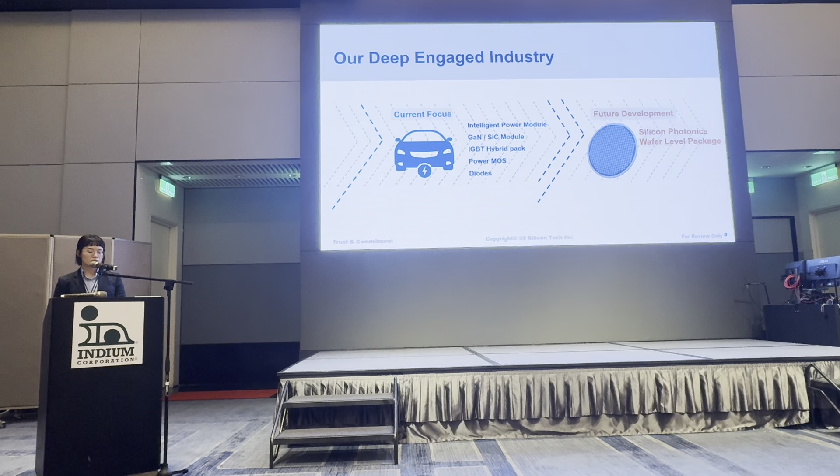We're also excited about expanding into some new territories and seeing great potential in wafer-level packaging and silicon photonics technology. That's where we are heading next. Now you might be wondering what 3S stands for. Well, each S represents a key part of who we are: system, solution, and service. Actually, these 3 elements really capture our commitment to power device assembly.

When we talk about system, we are focused on providing reliable equipment that really works for our customers' needs. For solution, we don't just sell equipment. We work closely with our customers to solve their specific challenges. And service, that's about being there for our customers, not just during installation, but whenever they need our support, including maintenance and technical assistance to ensure equipment quality. This is how we approach power device assembly, bringing these 3 elements together to create real value for our customers.

What sets 3S apart is our ability to integrate process, equipment, and materials into one complete solution. We don't just sell equipment, we provide comprehensive solutions that bring all these critical elements together to solve your semiconductor packaging challenges.

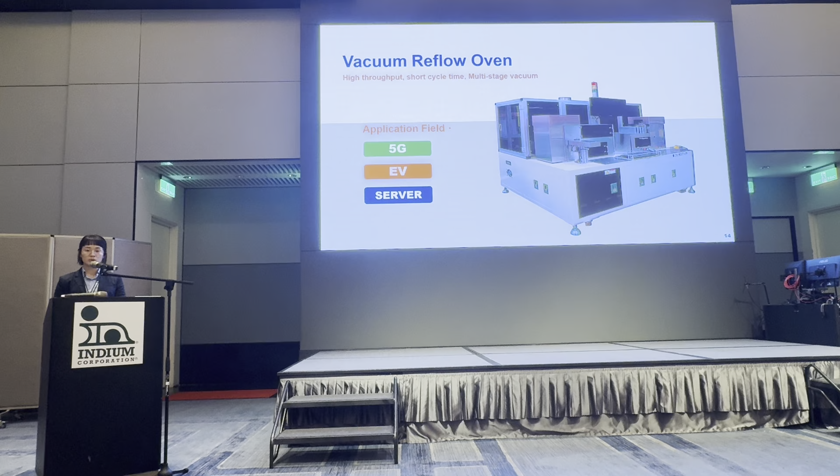Now, what makes our vacuum reflow oven special? It has two key parts: the multi-stage vacuum design and flexible temperature profile. We put separate vacuum chambers in key heating areas, so we can quickly create vacuum. This helps make the process better and greatly reduce void rate. Our multi-stage vacuum design also helps control how fast the flux turns into gas. This fixes common problems like solder splashing and chip flipping. Also, it can set different temperatures in different zones, making it easy to work with many types of solder paste.

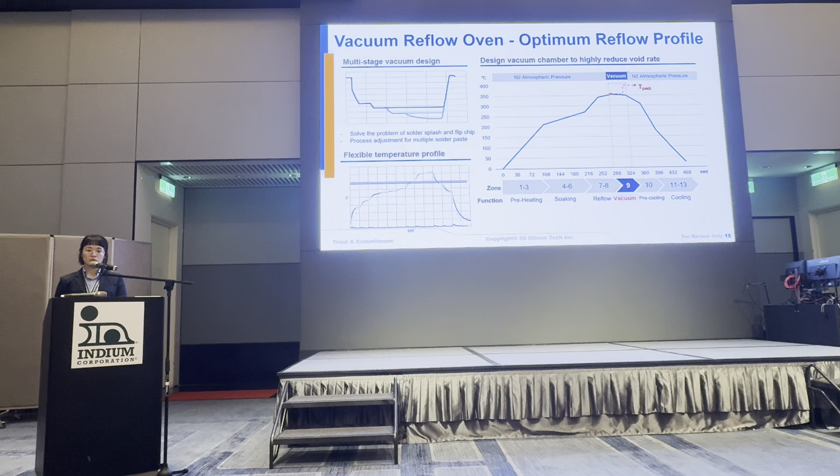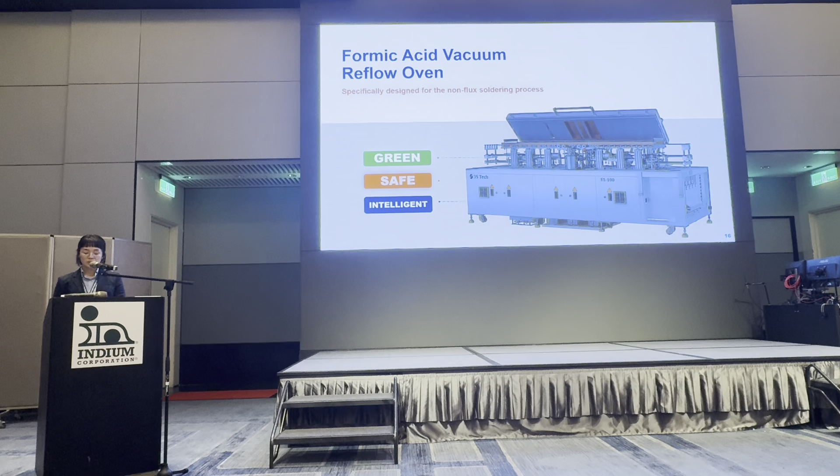Next, this is our formic acid vacuum reflow oven, which we developed in 2020 to help customers who need a non-flux soldering process. Our formic acid vacuum reflow oven comes with several smart features. It includes intelligent automation with real-time monitoring, from formic acid management to oxygen and toxic gas detection. And as I mentioned before, it's fully SECS/GEM compliant and ensures process quality through continuous formic acid purity monitoring. The system also offers comprehensive parameter control and production tracking, making it ideal for high-quality manufacturing.

And about the key safety features of our formic acid vacuum reflow oven: our closed negative pressure system prevents any formic acid or carbon monoxide leakage during operation. We've also built in continuous monitoring of these potentially harmful gases.

For environmental protection, our exhaust treatment system uses catalysts to break down formic acid and carbon monoxide into harmless carbon dioxide and water before releasing to the factory exhaust. So what makes the formic acid process so special?

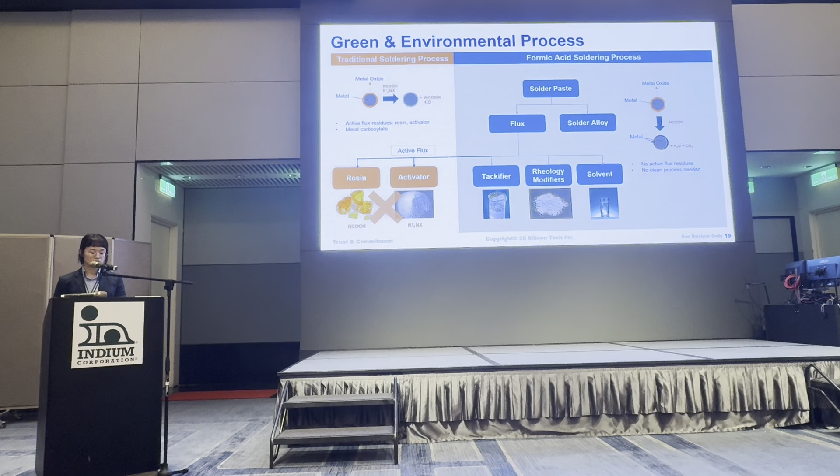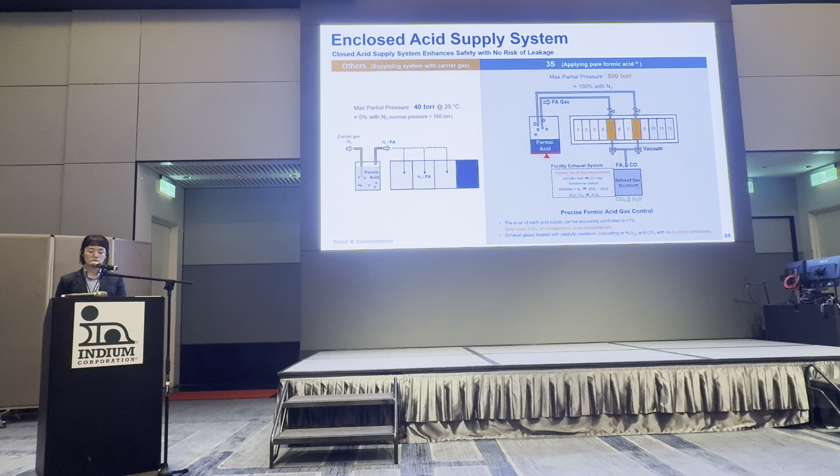Look at this comparison. The conventional way uses a mix of formic acid and nitrogen gases, which only allows for slow passive diffusion under normal pressure. In contrast, our pure formic acid system works under vacuum, creating much deeper and faster penetration.

The test results speak for themselves. Our pure formic acid gas penetrates 5 times deeper into solder powder than the mixed gas used by others. When testing with preforms, competitors' mixed gas often can't fully reduce the oxides inside, leading to poor solder melting. Our system doesn't have this problem.

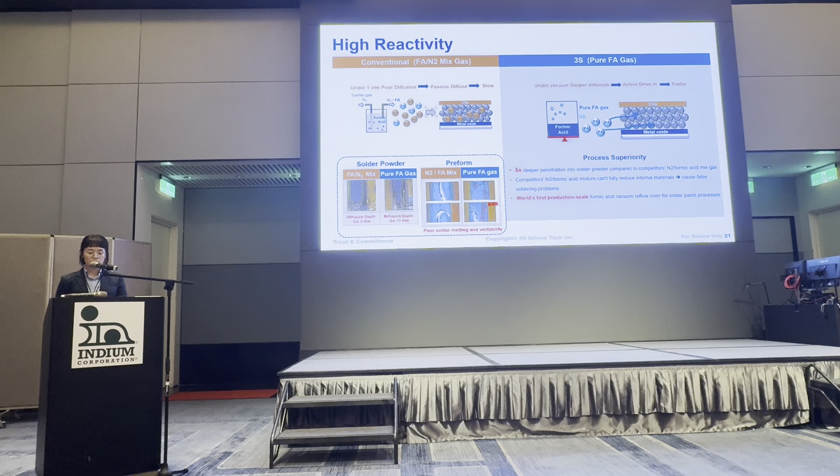And how we made formic acid work faster and better. Traditional systems mix formic acid with nitrogen gas, but this actually slows things down. Think of it this way: nitrogen gas is in the way, making it harder for formic acid to reach and react with the metal surface. Our pure formic acid system solved this problem.

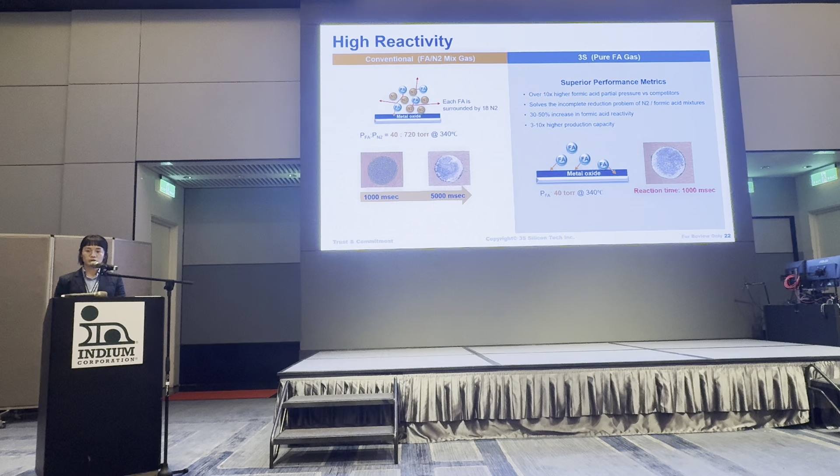With the same amount of formic acid at 40 torr, our pure system completes the reaction in just 1,000 milliseconds. How about the conventional? It takes 5,000 milliseconds, that's 5 times slower. This faster reaction isn't just about speed. It means better production efficiency and shorter cycle time for our customers.

To show our technology leadership, we've secured patents worldwide across key markets including the United States, Europe, China, Japan, Taiwan, and Malaysia. These patents cover 3 main areas: our unique materials and application method, our advanced acid supply system, and our exhaust gas treatment technology. It shows our commitment to protecting our innovation in formic acid vacuum reflow technology.

To wrap up our introduction of the formic acid vacuum reflow oven, here are some highlights of its key strengths. This system completely replaces traditional flux while using very little formic acid. With our secure closed acid supply system, we can deliver precise amounts of acid exactly where it's needed.

The high reactivity and fast penetration speed lead to excellent results. We can achieve void rates as low as 2% and process each strip in just 45 to 180 seconds. For those interested in the technical details, the system includes conductive heating, handles products up to 300 × 400 millimeters, and comes with comprehensive safety features. We also offer optional additions like profilers and oxygen meters to meet your specific needs.

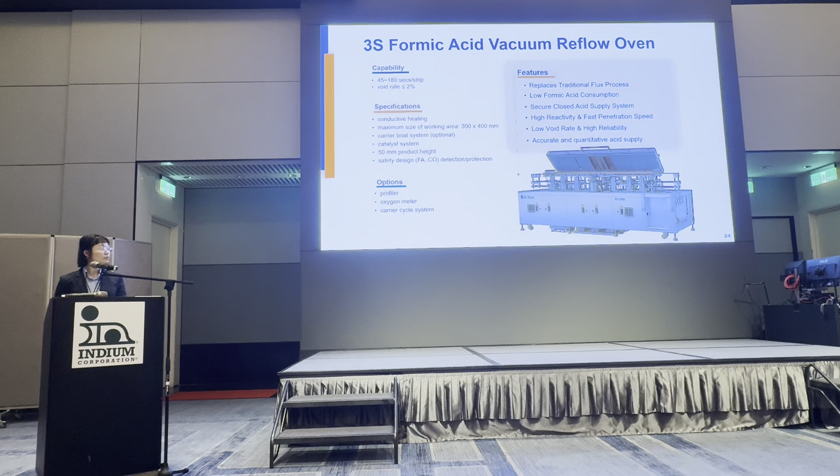Our service at 3S covers 4 main areas: our open lab for testing and prototypes, process development support, 24/7 technical support worldwide, and comprehensive maintenance service. Let me move on to tell you more about our open lab platform, which is one of our most valuable services for customers.

Our open lab is where innovation happens. 3S R&D team designs custom experiments based on your specific needs, whether it's for new products or process improvement. We help plan the right test, create prototypes, and work together to find the best solution for your product. What makes this really valuable is how it speeds up development time. You can quickly test and verify your ideas, helping you get to market faster without major upfront investment.

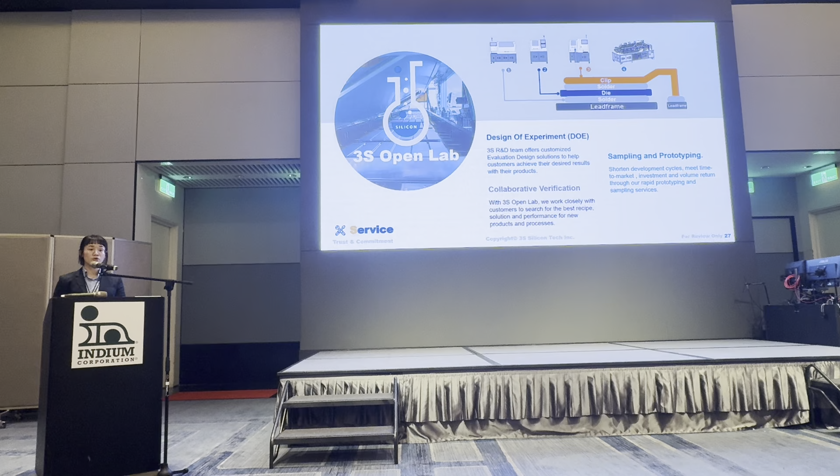In our Open Lab, we offer complete package testing capabilities from start to finish. This includes everything from solder paste deposition, both dispensing and stencil printing, to die and clip bonding. We also handle reflow soldering and finish with thorough quality inspection and analysis. Looking at the process flow you see here, each step is carefully controlled to ensure the best results for your product development.

And this is SAT. It's a specialized piece of equipment which uses ultrasonic technology to detect product defects. Not many companies have one, and we are happy to offer testing service if you need this capability.

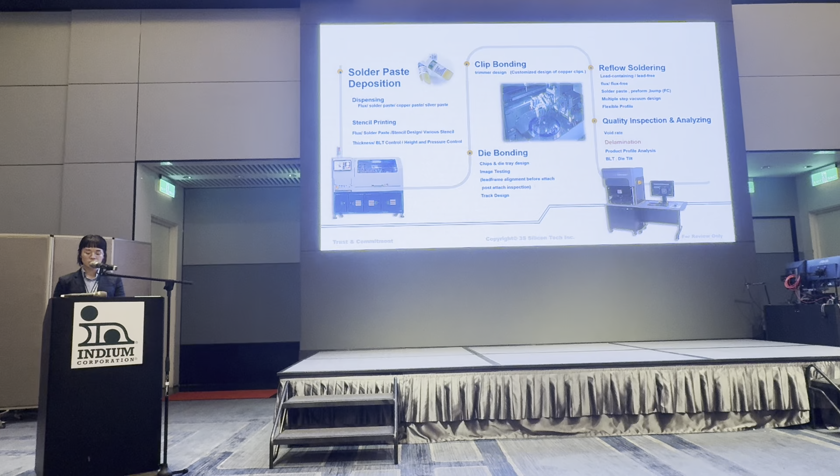Next, I will share some real success stories from our Open Lab platform. Let me show you what we've achieved through these cases. First, here are some success cases of vacuum reflow oven. These case studies are using Indium products.

Our vacuum reflow oven works well with both preforms and solder paste. Looking at the preform result, you can see we achieved almost complete wetting area after reflow. For solder paste applications, we work with different Indium models and adjust our process settings to match each type. We kept void rates under 3% consistently. The temperature profiles you see here show how we optimize the process for each specific material.

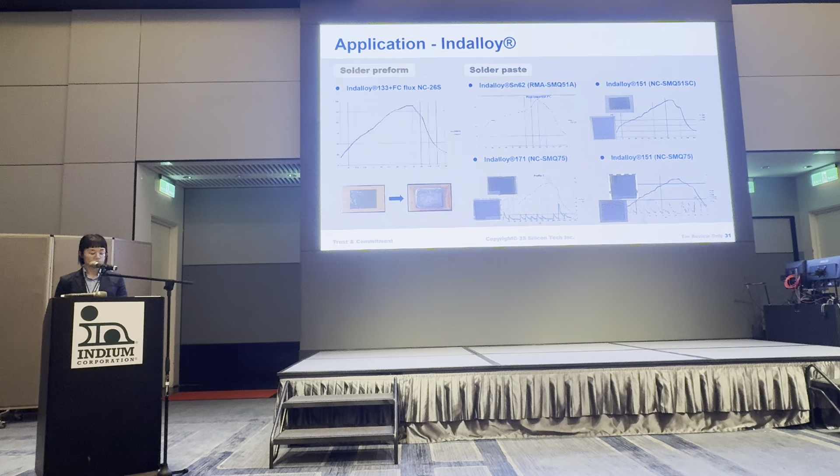Next, let's move on to our award-winning Formic acid vacuum reflow oven. These next examples will help you understand how it performs in different production scenarios. Here's our preform application data, where our Formic acid vacuum reflow oven handles various alloy types and sizes. We use either guide jigs or tacking agent for precise positioning during the process.

The critical aspect here is temperature management. I'd like to highlight this particularly challenging case in red: an alloy with a high eutectic point of 280 degrees C that required us to achieve a near zero void rate. For lead solder, which melts above 280 degrees C, Formic acid reacts quickly. However, with lead-free solder melting below 250 degrees C, the lower temperature means slower reaction. The challenge and our expertise lies in balancing these melting points with optimal reaction temperatures to achieve minimal void rates.

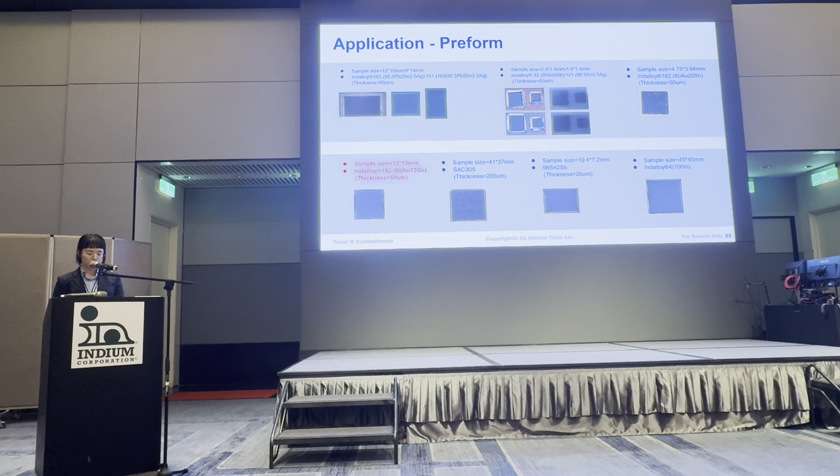These are some cases for two types of applications, preform and pre-bond process. For preform, our system effectively minimizes void rates, as you can see in these sample results, using different Indium materials. For pre-bond applications shown at the bottom, we've successfully worked with various materials including Indium and tin silver alloys.

I want to highlight this particular case in red. It required a unique acid supply approach. Unlike the standard reflow process, we had to develop a special parameter set through extensive testing to meet the customer's specific needs.

And about the solder paste application, our Formic acid vacuum reflow oven is pioneering mass production with both lead and lead-free solder. What's critical here is our process expertise, managing the precise timing of acid supply related to the solder's melting point and additive evaporation. If formic acid is supplied before the additive fully evaporates, it leads to incomplete reactions. Through our parameter optimization, we've overcome this challenge to achieve excellent void rates across different solder types.